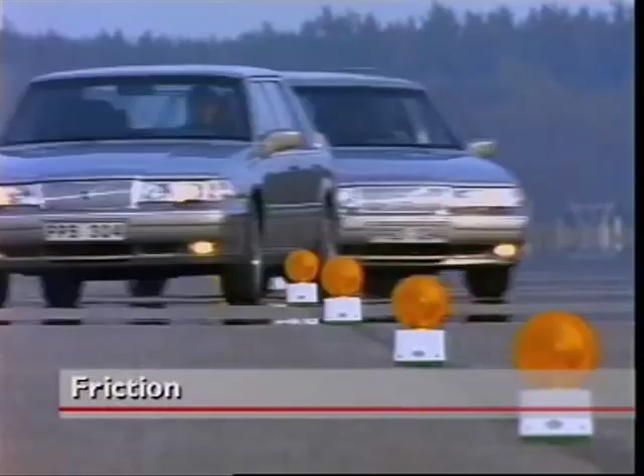Friction is a force that resists the movement of one surface over another. It can be desirable, but often is not. It is caused by surface rough spots that lock together. These spots can be microscopically small, which is why even surfaces that seem smooth can experience friction. Friction can be reduced, but never eliminated.

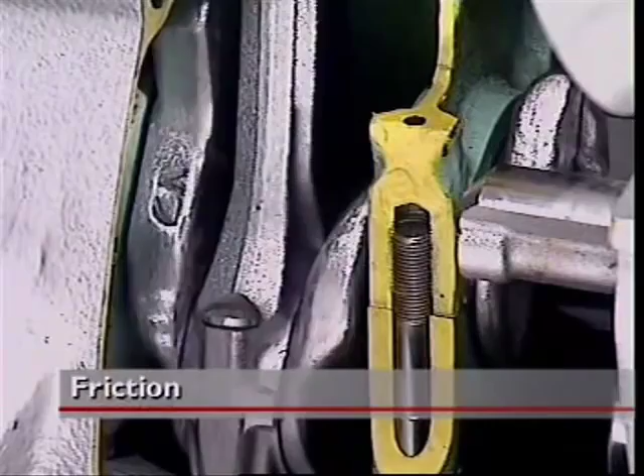Friction is always measured for pairs of surfaces using what is called a coefficient of friction. A low coefficient of friction for a pair of surfaces means they can move easily over each other. A high coefficient of friction means they cannot move easily over each other.

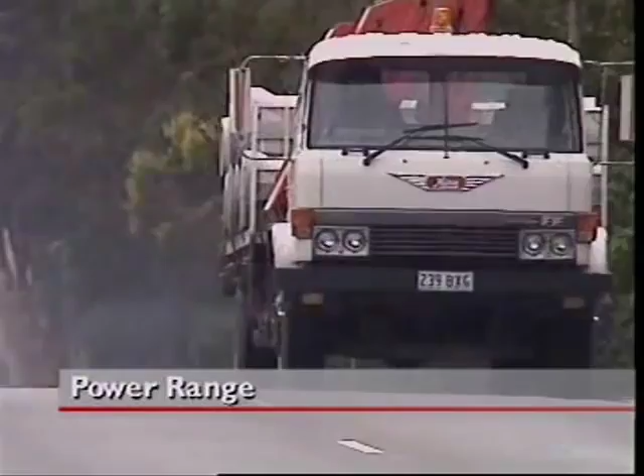An engine that is quite powerful may not be designed to produce its maximum power over long periods. A petrol engine in a car may give good acceleration in short bursts, but it can overheat or fail if it's operated at maximum speed and power for too long. A heavy-duty diesel engine in a large truck is designed to operate near or at its maximum speed and load for long periods without damage. Many diesels will suffer if they are run on light loads or at low speeds for too long.

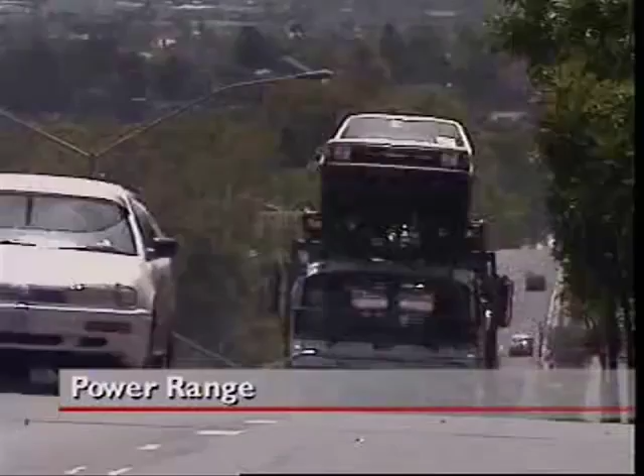One way to describe the power range of an engine is to give its load and speed as an average over a certain period. This is stated as a percentage and is called load factor. An engine required to operate at maximum power over 10 hours is said to have a load factor of 100%. Using that as a standard, most car engines would operate at only about 20 to 30%.

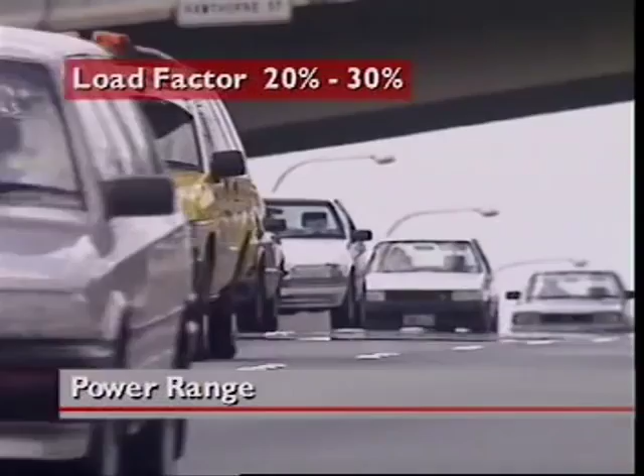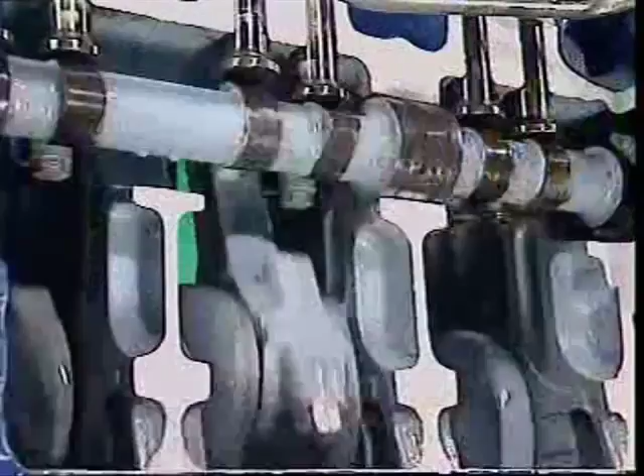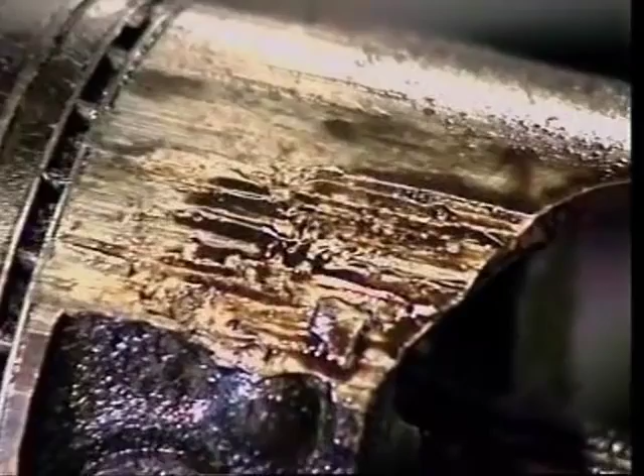One function of a lubrication system is to reduce friction. Friction occurs between all surfaces in contact. When moving surfaces come together, friction tends to slow them down. Sometimes that's just what's wanted. Friction can be useful, but it can also cause serious damage. It can make metal parts so hot they melt and fuse together. When that happens, an engine is said to have seized.

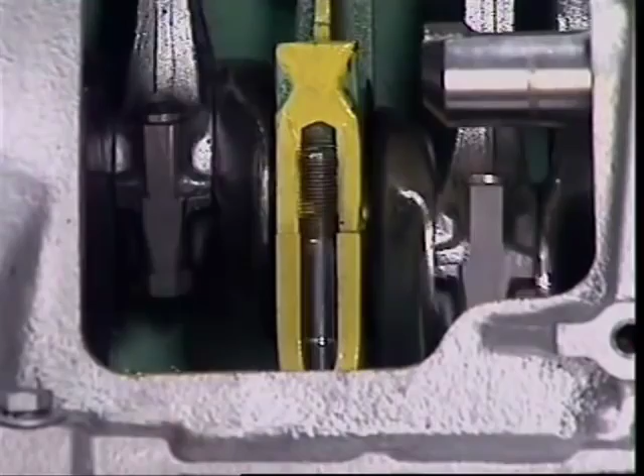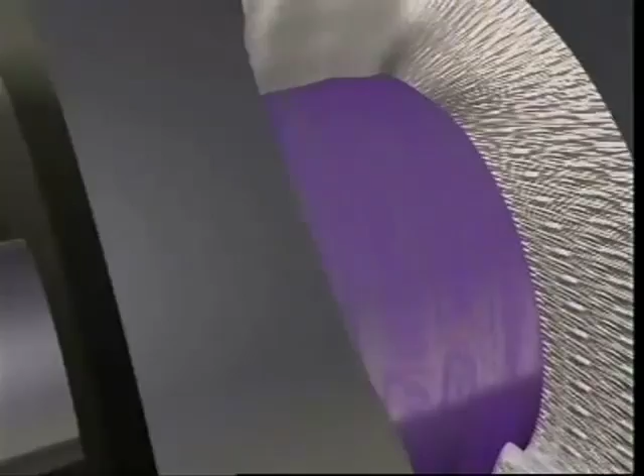How long an engine lasts depends to a large extent on how well it's lubricated, especially at the points of extreme loading. So lubrication reduces unwanted friction and controls it where it is useful. It reduces wear on moving parts. Clearances fill with oil so that engine parts move or float on layers of oil instead of directly on each other. Much less power is needed to move them, and that's a plus.

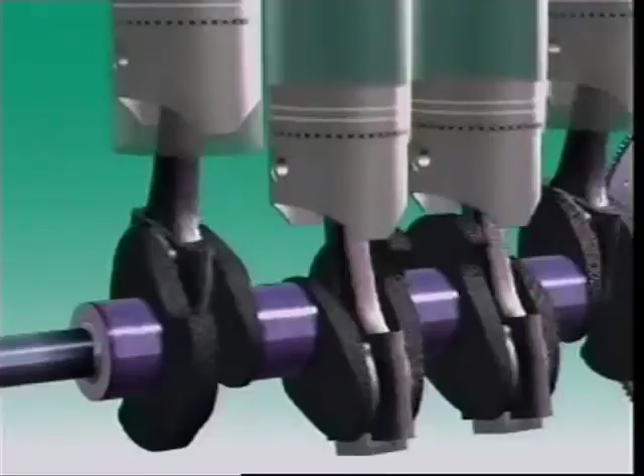It helps cool an engine. It collects heat from the engine, then returns to the sump where it cools. It helps absorb shock loads. A power stroke can suddenly put as much as 2 tons force on main bearings. Layers of oil cushion this loading.

Oil is also a cleaning agent. It collects particles of metal and carbon and carries them back to the sump. Larger pieces fall to the bottom.

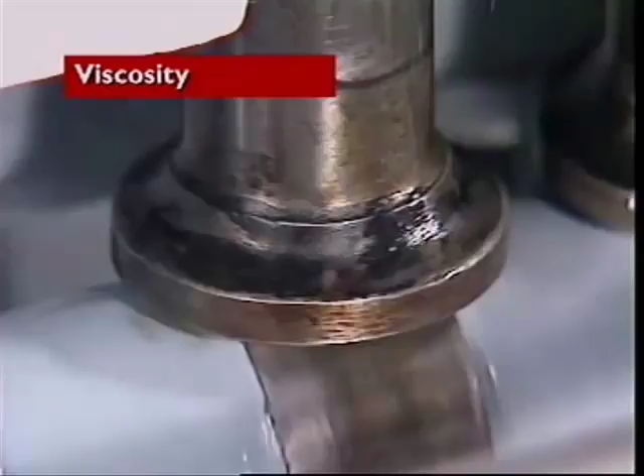For oil to do all of the work that's expected of it, it must have special properties. Its viscosity is crucial. Viscosity is a measure of how easily a liquid flows. Low viscosity liquid is thin and flows easily. High viscosity liquid is thick and flows slowly.

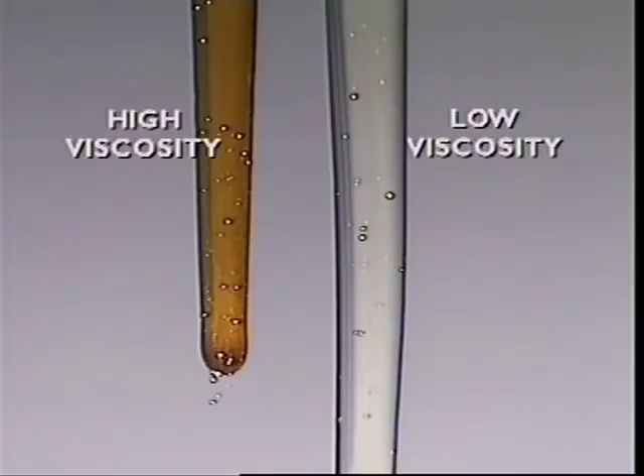Lubricating oil must be thin enough to circulate easily between moving parts, but not so thin that it will be forced out from between them. If it is forced out, parts will be left in direct contact and they'll be damaged. If it's too viscous, it moves too slowly to protect parts, especially in a cold engine.

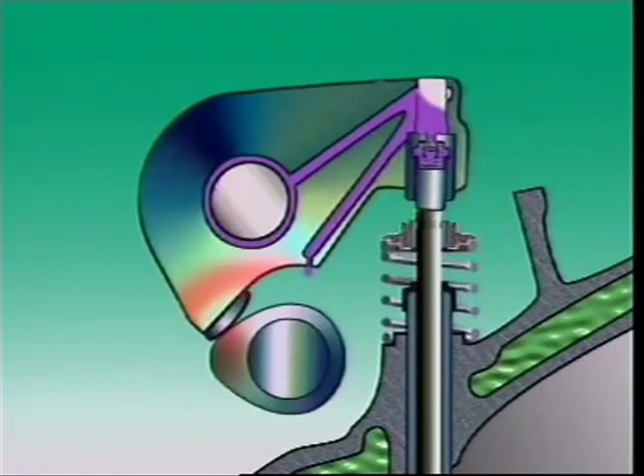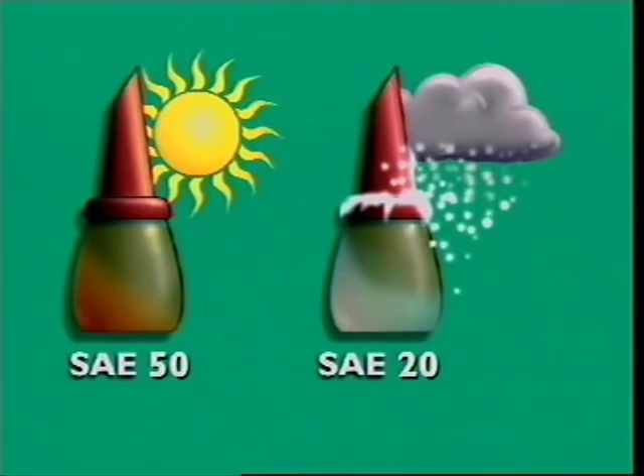It was once normal practice for engines to need one grade of oil for summer and another for winter. Oils are graded or classified by the Society of Automotive Engineers, or SAE. An engine oil with an SAE number of 50 has a higher viscosity, or is thicker, than an SAE 20 oil.

Oils with low viscosity ratings, say SAE 5W, 10W and 20W, were tested at a low temperature, around minus 18 degrees Celsius, and were used for cold conditions. Oils with high viscosity ratings, say SAE 20, 30, 40 and 50, were tested at a high temperature, around 99 degrees Celsius, and were used for hotter conditions.

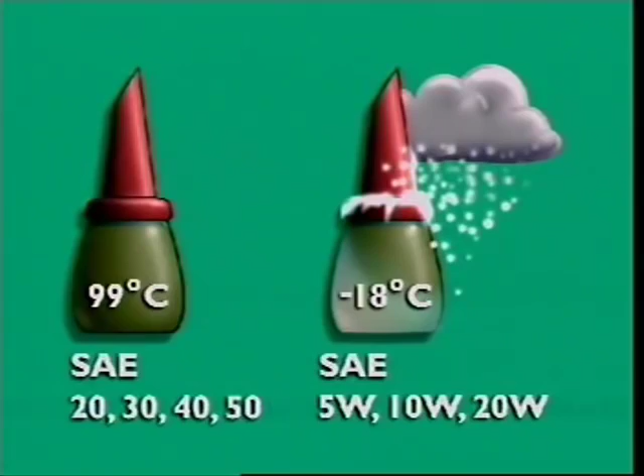Modern oils, however, are blends of oils which combine these properties. The oils are blended with additives called viscosity index improvers to form multigrade or multi-viscosity oils. They provide better lubrication over a wider range of climatic conditions than monograde oils.

Oil is also classified by the American Petroleum Institute, or API, service classification. Oils for spark ignition engines carry a prefix S, and diesel or compression ignition engines use C. Some oils have additives that make them suitable for both. Manufacturers recommend which viscosity and API classification is ideal for a particular engine.

Special chemicals called additives are added to the base oil by the oil companies. Different combinations of these additives allow the oil to do different jobs in an engine.

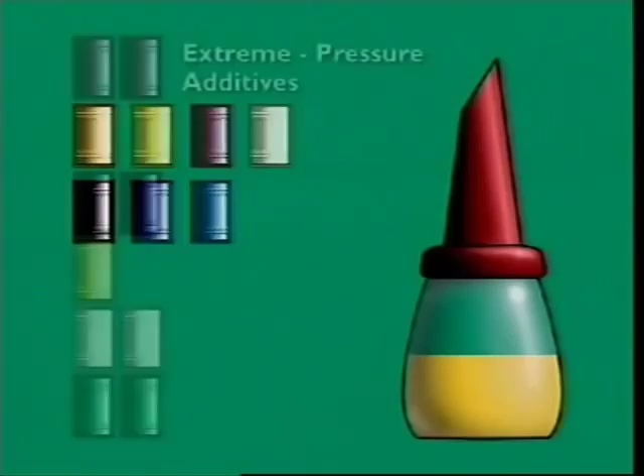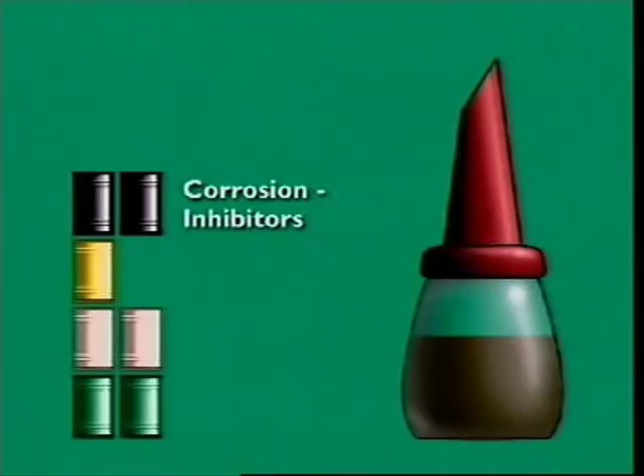Extreme pressure additives coat parts with a protective layer so that the oil resists being forced out under heavy load. Oxidation inhibitors stop very hot oil combining with oxygen in air to produce a sticky material like tar that clogs galleries. Corrosion inhibitors help stop acids forming that cause corrosion, especially of bearing surfaces. Anti-foaming agents reduce the effect of oil churning in the crankcase and minimize foaming.

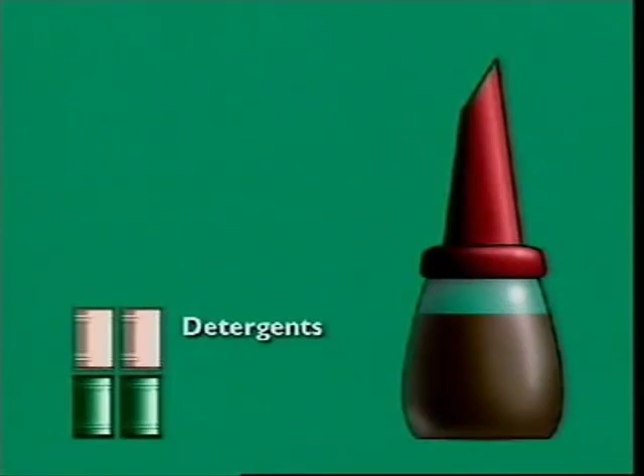Detergents reduce carbon deposits on parts like piston rings and valves. Dispersants collect particles that can block the system, separate them from each other and keep them moving. Then they will be removed when the oil is changed.

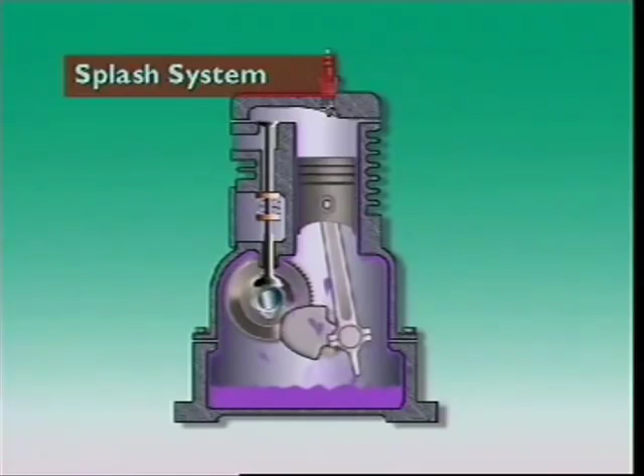Most small four-stroke petrol engines use what is called splash lubrication. On horizontal crankshaft engines, a dipper on the bottom of the connecting rod scoops up oil from the crankcase for the bearings. In this engine, it is also able to splash oil up to the valve mechanism.

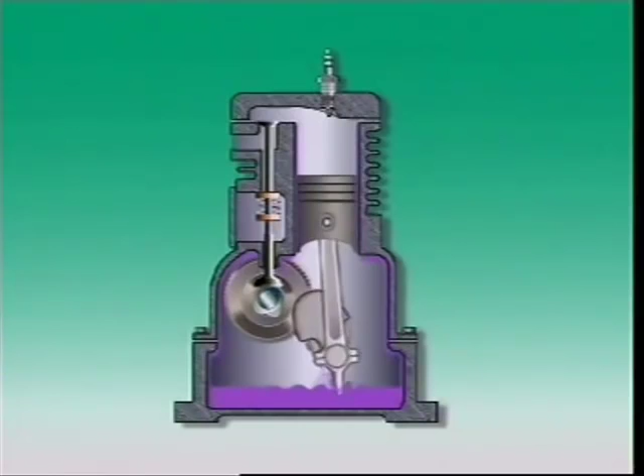Alternatively, an oil slinger can be driven by the camshaft. A similar system is used in most small vertical crankshaft engines.

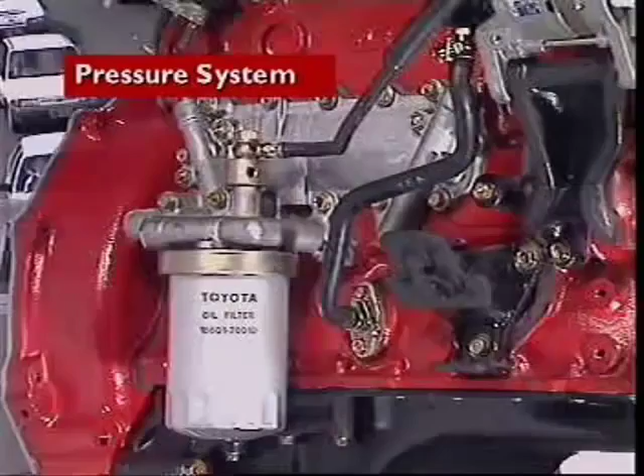Modern vehicle engines use a pressure or force feed lubrication system where the oil is forced around the engine under pressure. Let's look at petrol engines first.

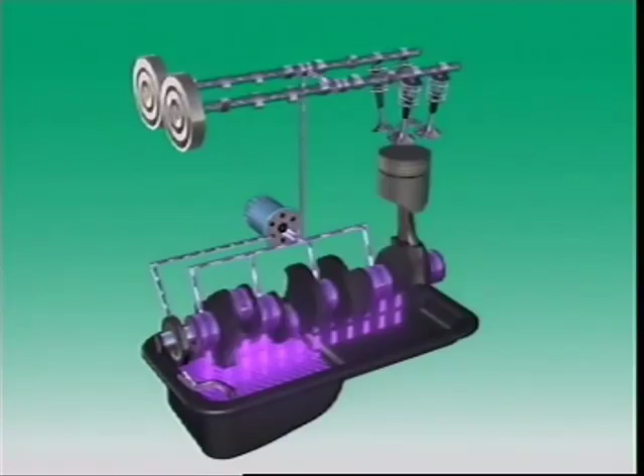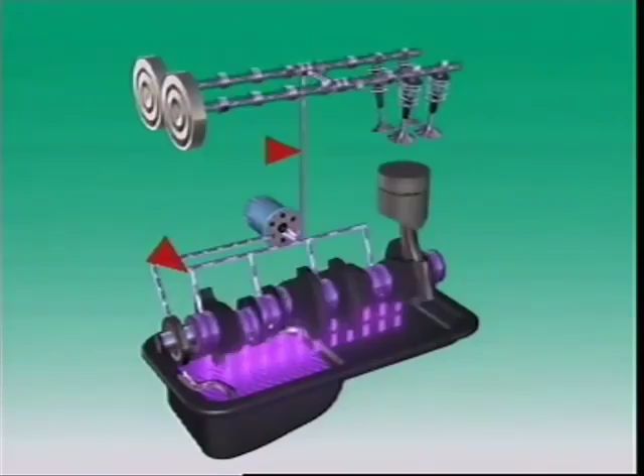Oil won't flow up into the engine by itself, so a pump collects it through a pickup tube and a strainer and forces it through an oil filter, then into passageways in the engine block called galleries. The galleries allow oil to be fed to the camshaft bearings, the valve mechanism and the crankshaft main bearings.

Holes drilled in the crankshaft webs allow the main bearings to supply oil to the big end bearings. After circulating through the engine, the oil falls back to the sump to cool. This is called a wet sump lubrication system because the oil is kept in the sump ready for the next time it's used.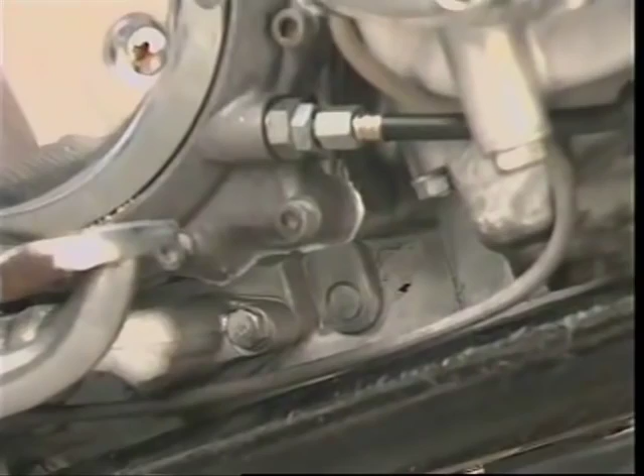Some special engines use a dry sump lubrication system. It uses all of the parts that make up a wet sump system and it lubricates the engine in the same way. It differs from the wet sump system in the way the oil circulates.

In a dry sump system, the oil falls to the bottom of the engine into an oil collection pan. A scavenge pump then pumps it to an oil tank where it is stored until the normal oil pump collects it and pumps it through the filter and engine in the normal way.

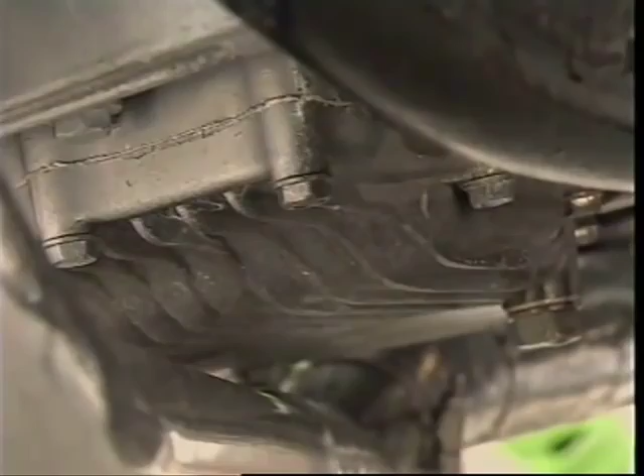Because there is no oil storage sump, the engine can be mounted much lower than in a wet sump system. The oil tank can be positioned away from the engine where it can get best cooling, and the amount of oil in the system can be much greater than in a wet sump system.

Diesel engines are lubricated in much the same way as petrol engines, but there are differences. Diesel engines typically operate at the top end of their power range, so their operating temperatures are usually higher than those in similar petrol engines, so the parts in diesel engines are usually more stressed. As a result, diesel oils need a different range of properties and are classified differently.

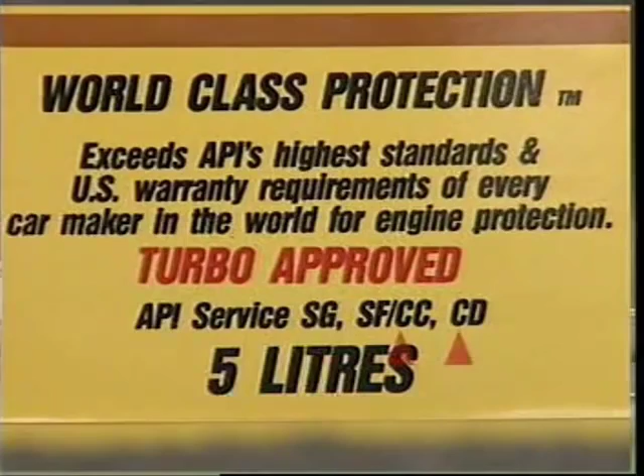It's common for some diesel engines to use an oil cooler to cool the oil in the engine. The cooler and oil filter are usually on the same mounting on the cylinder block.

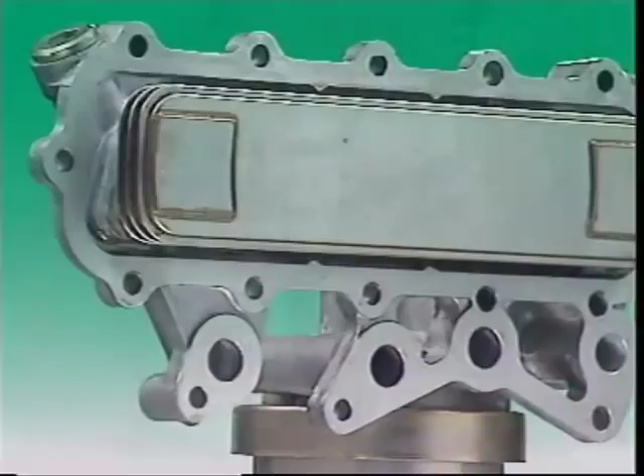Some two-stroke petrol engines use an oil injection system. This system doesn't need the oil and petrol mixed manually. An engine-driven oil pump takes oil from a tank and pumps a measured amount directly into the engine, where it will mix with the fuel and lubricate the internal engine parts.

The pump delivers the correct amount of oil for the engine speed and the throttle setting, which makes it a more precise system than running the engine on a fixed oil-petrol mixture.

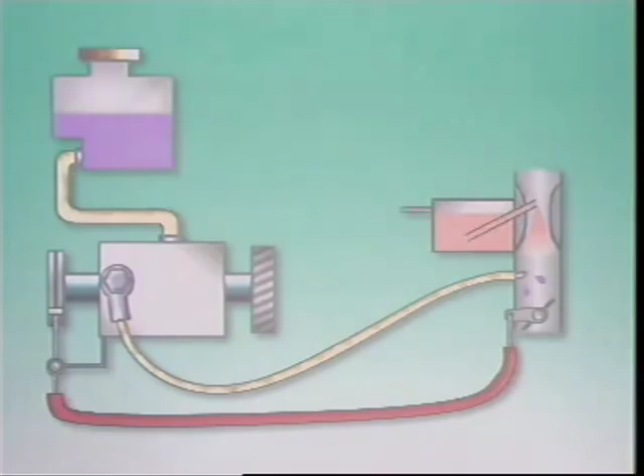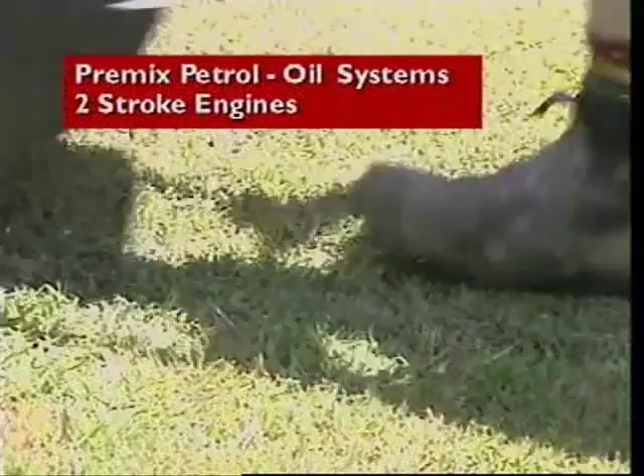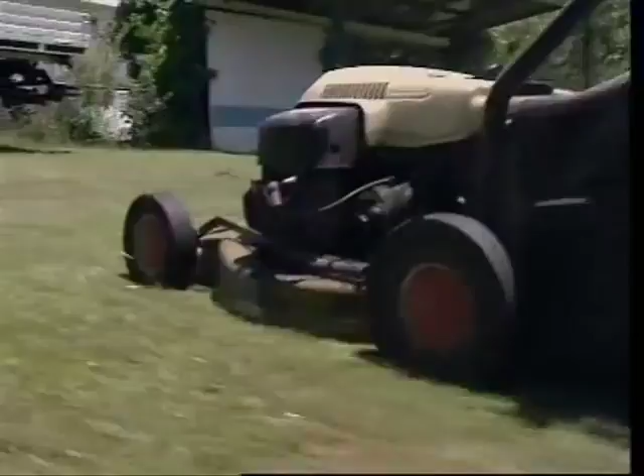Most two-stroke petrol engines use a set petrol oil mixture for lubrication. There are different kinds of oils and petrol oil mixtures. They must be used according to the manufacturer's specifications.

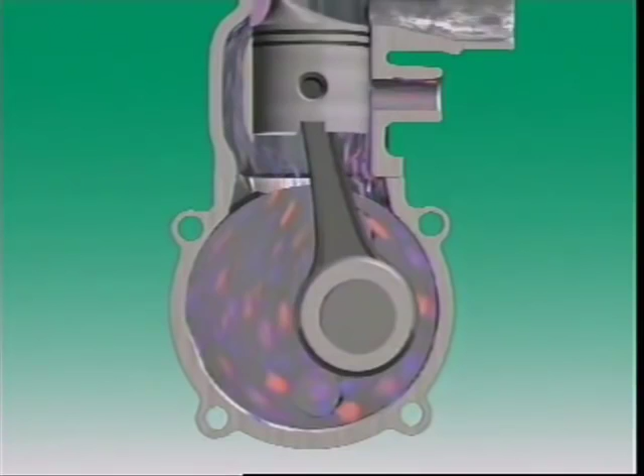For small two-stroke engines, the oil and fuel are pre-mixed. A mixture of air, oil and fuel passes through a sealed crankcase on its way to the combustion chamber. That makes the crankcase part of the fuel intake system, so it can't be used as a sump.

As the air, fuel and oil enter the crankcase, the fuel evaporates, leaving behind enough oil to keep parts coated and lubricated.

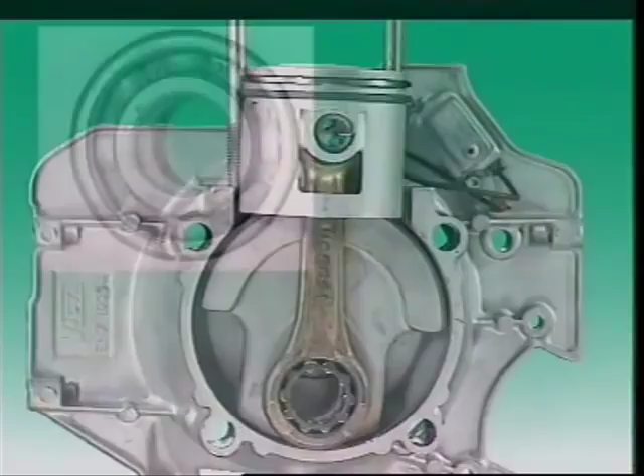The crankshaft and connecting rod bearings in two-stroke engines are ball and roller types. Because the parts of this kind of bearing only roll over each other, they only need a minimum of lubrication.

Let's look at the rotary engine lubrication system. Its main lubrication system is similar to that of a four-stroke petrol engine.

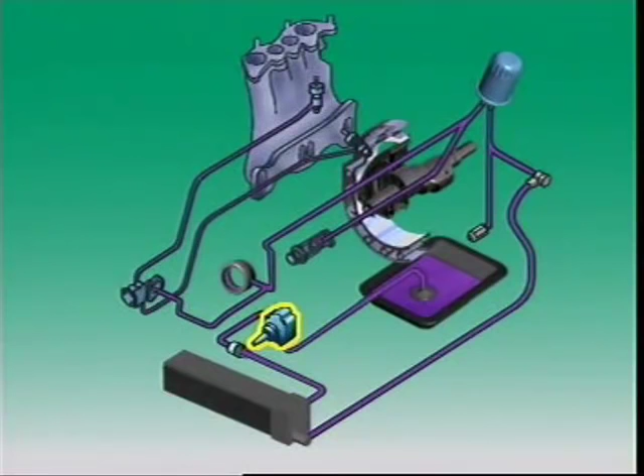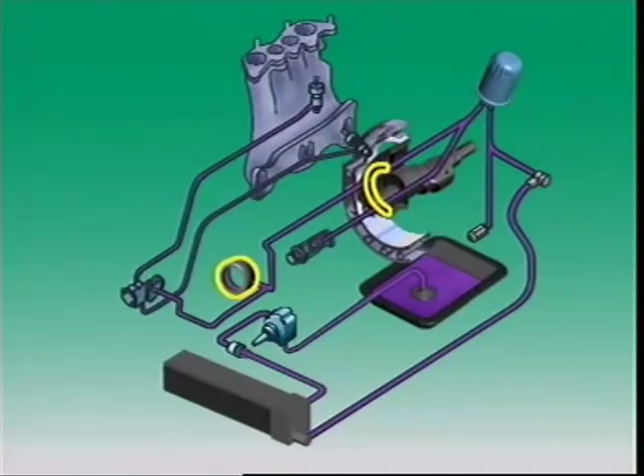An oil pump picks up oil from the oil pan through a strainer and delivers it to an oil cooler on the front of the engine. The oil cools, then enters the oil filter at the rear of the engine. A regulator valve controls the oil pressure in the system. The oil goes onto the main bearings and rotor bearings and is sprayed into rotor cavities. Along the way, it absorbs heat, then returns to the oil pan.

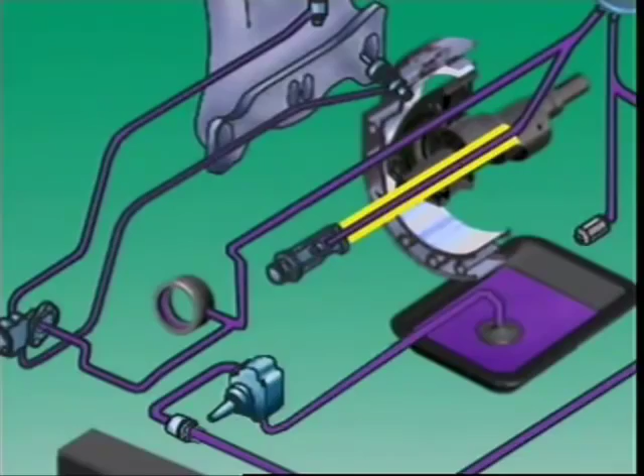A bypass valve at the end of the eccentric shaft helps the engine warm up. When the engine is cold, it stays open and sends oil from the shaft to the oil pan and stops it spraying on the rotors. As the engine heats, the valve starts to close. Pressure in the shaft builds up and cooling oil starts to spray on the rotors.

The rotary engine uses oil injection. A pump sends oil to oil nozzles in the intake manifold and to oil nozzles in the intake passages in the rotor housings. Oil from these nozzles goes to the engine and lubricates the rotor seals. If the engine has a turbocharger, oil lubricates it as well.

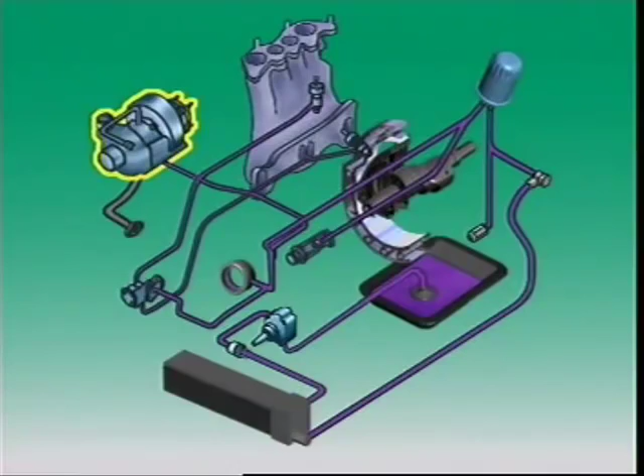This section examines the sump. The sump is bolted to the engine under the crankcase. It is a reservoir or storage container for the engine lubricating oil and a collector for oil returning from the engine lubricating system. The sump can be formed as a thin sheet metal pressing and shaped to ensure that oil will return to its deepest section.

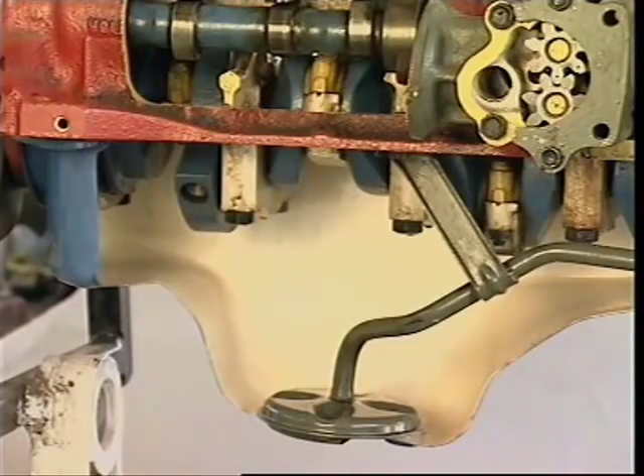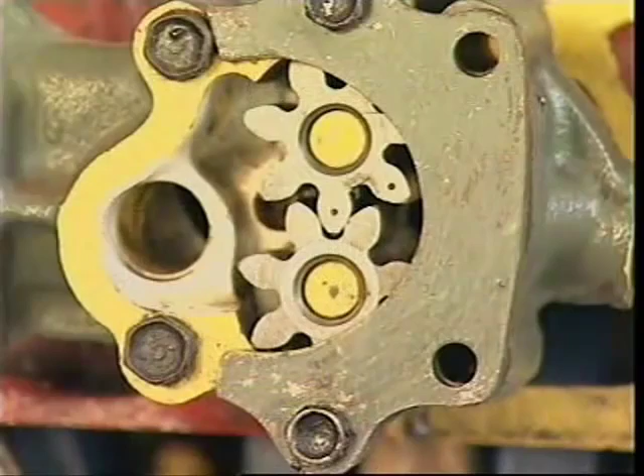The oil pickup tube and strainer are located in this deep section to ensure they stay submerged in oil and to prevent air being drawn into the oil pump. Some high-performance vehicles have a windage tray fitted to prevent churning of the oil by the rotation of the crankshaft. Baffles prevent oil from surging away from the pickup during cornering, braking and accelerating. The sump's large external surface area helps heat transfer from the oil to the outside air. In some designs, the sump is an aluminium alloy casting with fins and ribs to assist in this heat transfer.

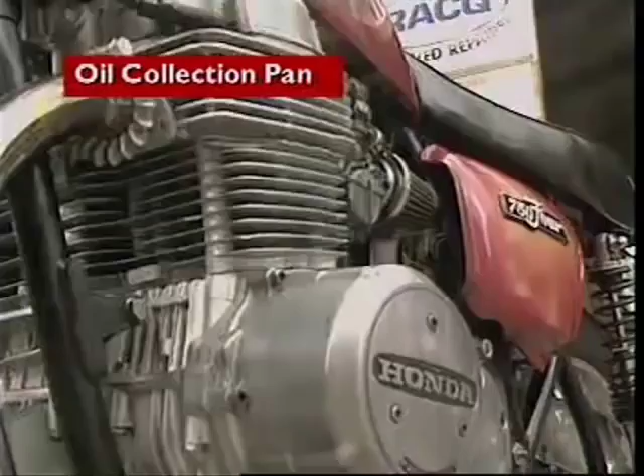The oil collection pan is part of the dry sump system which is used in some motorcycles. It replaces the sump in the wet sump system, but it is much smaller. It collects the oil after it is circulated through the engine and directs it to the pickup strainer on the scavenge pump. Since no oil is stored in the engine in this system, a dipstick that is normally used to check oil levels in the sump is not needed.

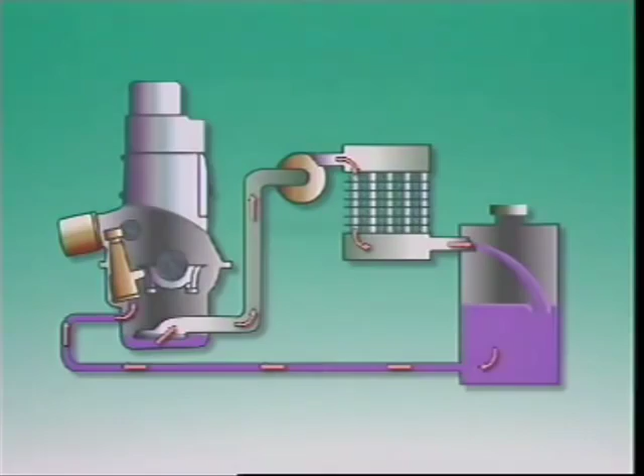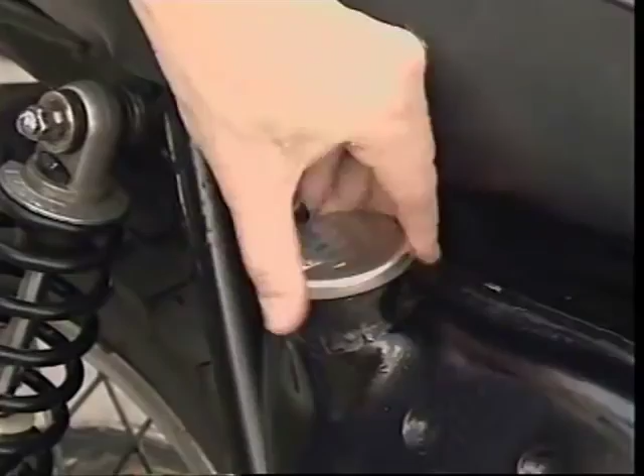The oil tank is part of the dry sump lubrication system. It is usually positioned away from the heat of the engine, and the large surface area improves cooling. It receives oil from the scavenge pump and allows it to settle and cool. The main oil pump then pumps it back through the lubrication system. A dipstick is often provided to measure the oil level.

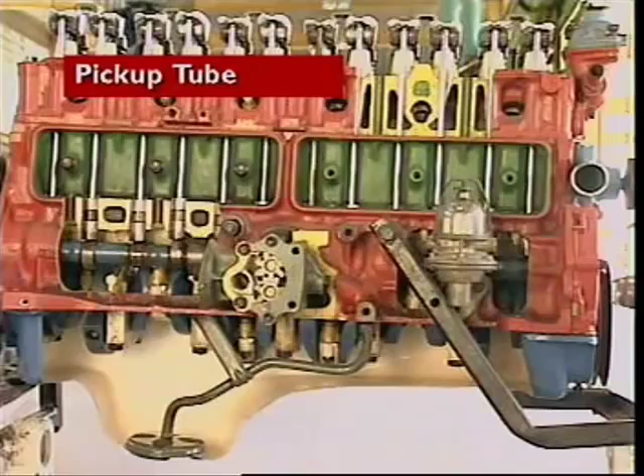Between the sump and the oil pump is a pickup tube with a flat cup and a strainer immersed in the oil. The strainer stops large particles of dirt and carbon entering the pump and damaging it. The pickup tube leads to the inlet of the oil pump on the low pressure side of the pump.

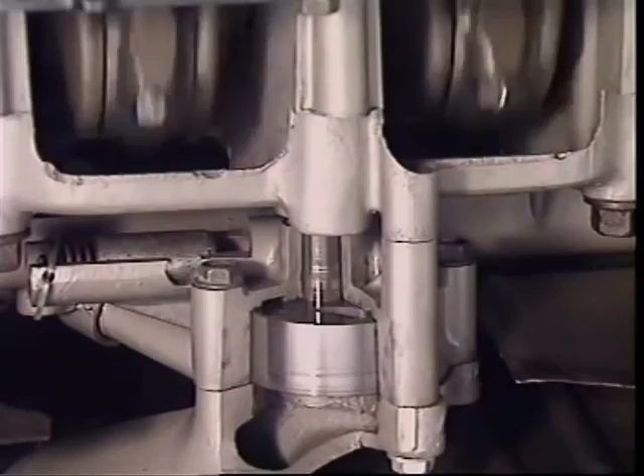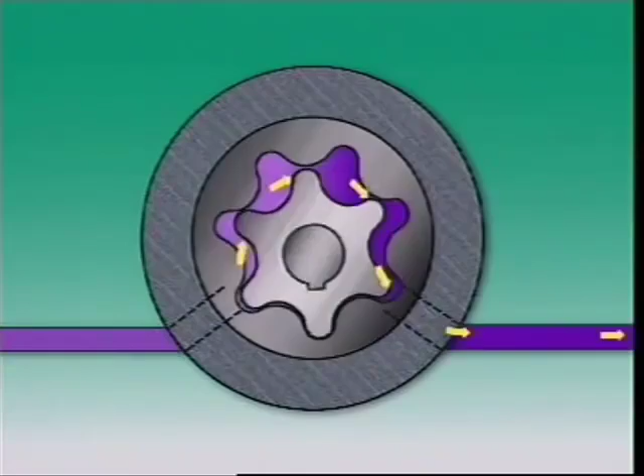Oil pumps may be driven from the camshaft or the crankshaft. In a rotor-type oil pump, an inner rotor drives an outer one. As they turn, the volume between them increases. This larger volume lowers the pressure at the pump inlet. Outside atmospheric pressure is then higher. This forces oil into the pump, and it fills the spaces between the rotor lobes. As the lobes of the inner rotor move into the spaces in the outer rotor, oil is squeezed out through the outlet. The crescent pump uses a similar principle.

It is mounted on the front of the cylinder block. The inner gear is on the end of the crankshaft, which then drives the pump directly. An internal toothed gear meshes with this inner one. Some gear teeth are meshed, but others are separated by the crescent-shaped part of the pump housing. The increasing volume between gear teeth causes pressure to fall. Oil is then taken through the intake port and carried around between the gears and crescent, then discharged to the outlet port.

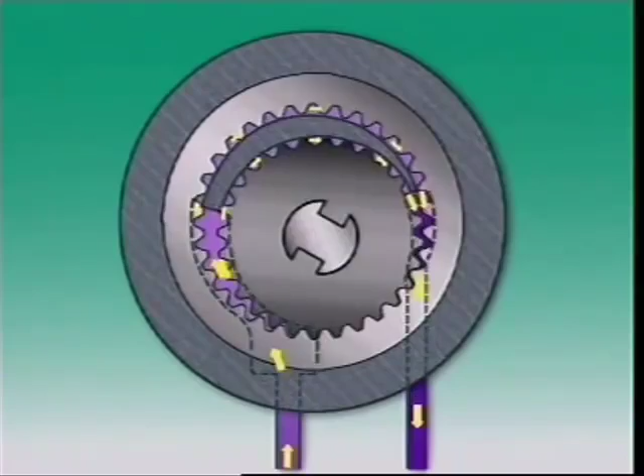In a geared oil pump, the driving gear meshes with a second gear. As both gears turn, their teeth separate, creating a low pressure area. Higher atmospheric pressure outside forces oil up into the inlet. The spaces between the teeth fill with oil. The gears rotate and carry oil around the chamber. The teeth mesh again, and oil is forced from the outlet toward the oil filter.

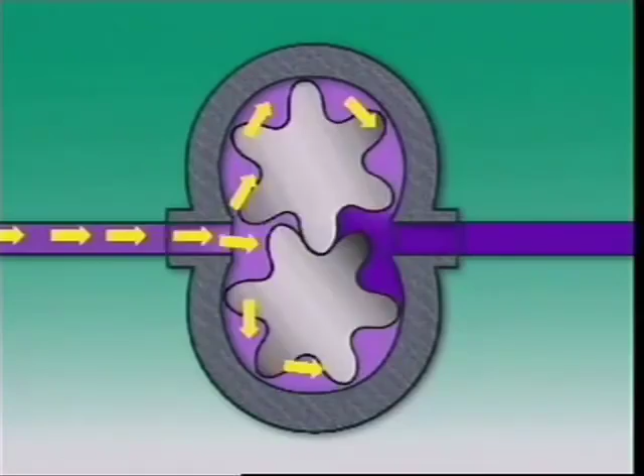A normal pump is capable of delivering more oil than an engine needs. It's a safety measure to ensure the engine is never starved for oil. As the pump rotates and engine speed increases, the volume of oil delivered also increases.

The fixed clearances between the moving parts of the engine prevent oil escaping back to the sump, and pressure builds up in the system. An oil pressure relief valve stops excess pressure developing. It's like a controlled leak, releasing just enough oil back to the sump to regulate the pressure of the whole system.